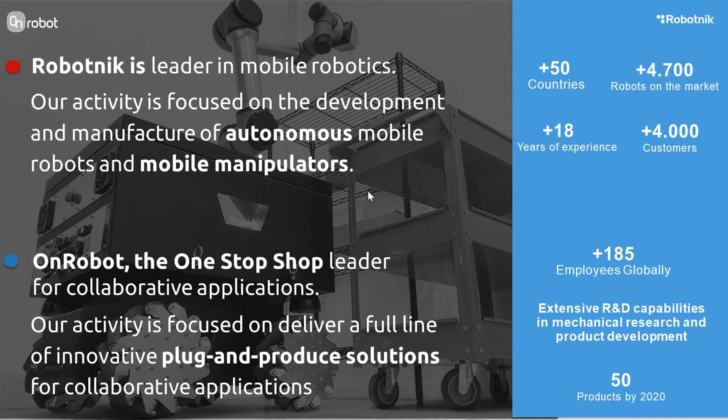Robotnik not only designs and manufactures the robots as final products, it also provides professional robotics services for any kind of applications. That's because we've been taking part in R&D projects since our foundation, and we are used to developing solutions such as manipulating robots, solar field maintenance robots, autonomous bogies for autonomous car development projects, stock control robots for retail shops, for example, and many other applications.

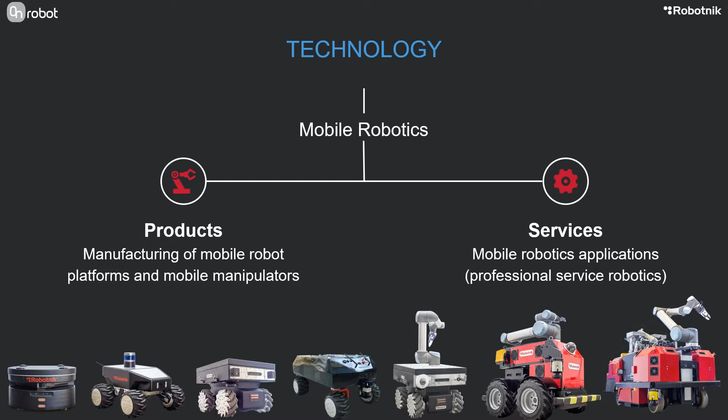As for precision and reliability, this is achieved with good sensors, of course. It is very easy to configure the robot by means of our online configurator, and there you can select for each robot the different types of end effectors, GPS, cameras, LiDARs, and even the arm that fits the most.

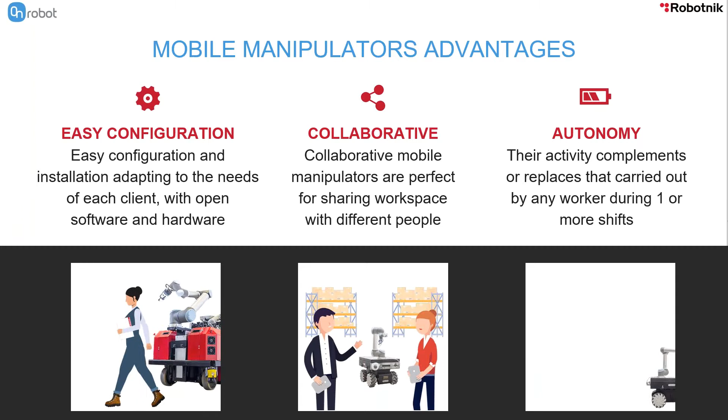All our robots work upon ROS with open software and hardware. They are collaborative and provide enough autonomy to complete a whole working shift. That's to say, 8 to 10 hours. We can also provide an automatic docking station for autonomous recharge if you need to work non-stop.

My colleague Marta will explain in depth several of the advantages of our mobile manipulators, but I wanted to put a spot on the fleet management system. There are many manufacturers of AGVs that make the robot, but don't provide all the software packages. And then they entrust all the navigation aspects to an external navigation system with non-open source software. Well, this has few advantages and many drawbacks.

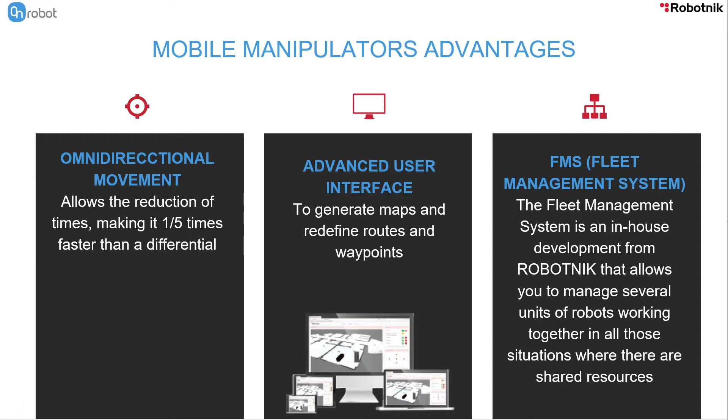We don't do that. What is clear is that Robotnik has an in-house fleet management system, and we offer the robot with the complete package, and we provide support at all times. In the other way, as there are several suppliers, what happens at the end is that they pass the problem responsibility one to the other, and in the end, the customer doesn't get a solution. And this is not what you want, I guess.

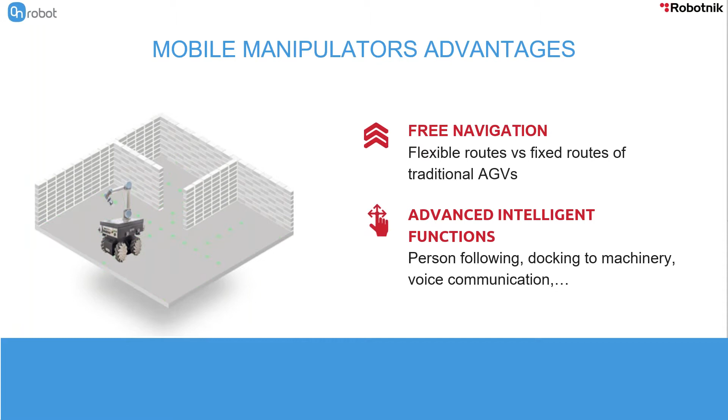Our robots navigate with SLAM navigation. SLAM stands for Simultaneous Localization and Mapping. This makes the whole system much more dynamic because it's not required to add or build anything on site, such as magnetic tape or punctual magnets to be embedded in the floor. The robot will build up a real layout of the environment and will locate itself at any moment as it navigates.

We have a wide range of advanced intelligent functions that make our robots suitable for applications such as the hospital fight against COVID, industrial logistics, last mile delivery, and many others, either indoor or outdoor.

To be performant in all those missions, the manipulator must be equipped with the appropriate end effectors and also the appropriate visualization tools. In that field, we rely upon OnRobot, which has the capacity to deliver a full line of innovative plug and produce solutions for collaborative applications.

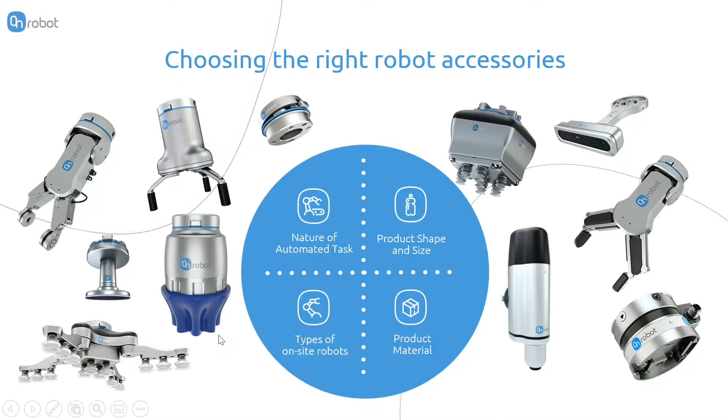Thank you, Nestor. So as you say, we at OnRobot build tools that are a perfect fit for mobile manipulators. On screen, we have now a selection of the OnRobot product portfolio. These tools can be used both in collaborative applications, but also in traditional robotic applications.

Our tools are a perfect fit for a mobile manipulator because they are fully electrical or also mechanical, meaning that we do not need a complex setup of cables or a pneumatic installation to be able to work with our tools in a mobile robot. Now I will focus on 3 of these tools, but as you can see in the picture, we can solve many different applications like material handling, palletizing, surface finishing, screw driving, manipulation in the food industry, etc.

The first tool that I will explain is the Gecko SP. This is a mechanical device made to solve pick and place manipulations of flat objects. With the Gecko SP, we can handle up to 5 kilos, and it is suitable for objects with clean and smooth surfaces like PCBs, glass, polished metals, solar cells, etc.

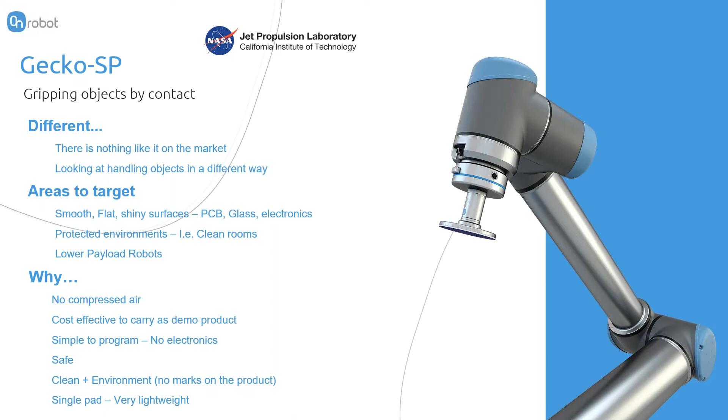The benefit of the Gecko SP is that we do not need any cable and we do not need any programming, resulting in a very fast and easy deployment and a quick return on investment. The Gecko leaves no marks on the objects, making it perfect to pack finished products inside of the box prior to being shipped to the customer.

The second tool is the VGC10. VGC10 is a vacuum gripper with an integrated pump inside of the body. With the integrated pump, we generate the vacuum inside of the tool itself. This means that we do not need any air compressor or pneumatic tubes. When talking about mobile manipulators, the VGC10 is perfect because we can move around the robot and the gripper without having to install any air compressor inside of the mobile manipulator.

It is clear that this makes a saving in weight for the mobile robot and also in cost and complexity for the whole application. The VGC10 can handle up to 15 kilos, and it is very customizable to adapt the position of the suction cups to the geometry of the object that we will need to pick.

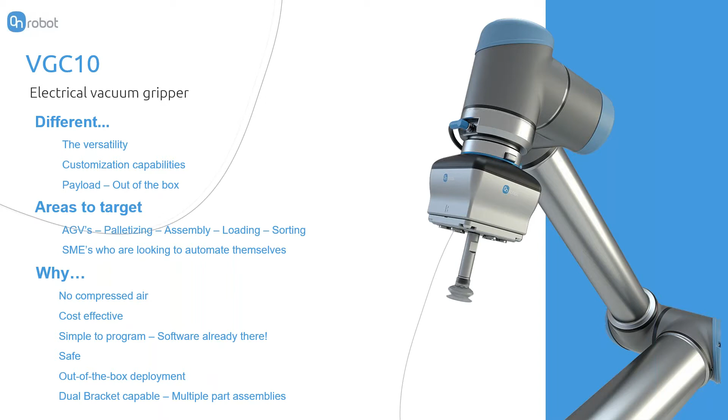Also in the demo today, we will see the vision system called OnRobot Eyes. The OnRobot Eyes is a 2.5D vision system. 2.5D means that we can detect the location of the objects and also their height. The setup of the camera is quite easy. We can mount it either on the robot, like in today's demo that you will see, or we can also mount it fixed in a position outside of the robot. The camera is able to detect colors, different geometries, and we can also do conveyor tracking with the camera.

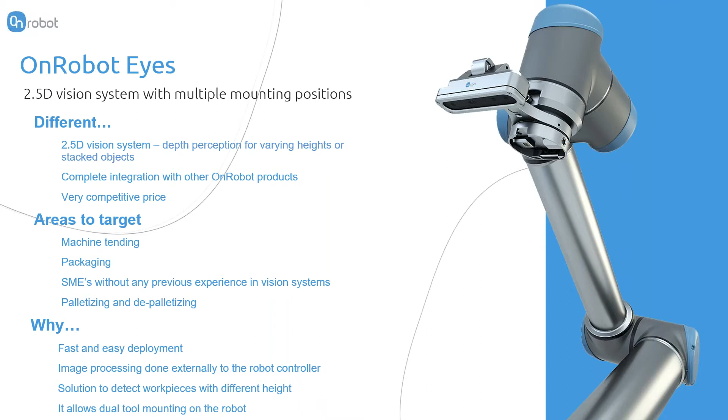My colleague Oriol will show us now what these tools look like and how we can mount them very easily on the robot, thanks to the OnRobot Quick Changer. So please, Oriol, if you would be so kind to show it to us.

Hi all, this is Oriol Vázquez, Regional Applications Engineer for OnRobot in South Europe. As my colleague Enrique said, I'm going to do a small hands-on during this webinar.

Okay, first of all, OnRobot tools are connected and plugged through the quick changer. Through the quick changer, we run just one cable from the quick changer to our brain, our compute box, and with this compute box we can control all our tools. In some robots we can also be connected directly to the robot flange. In some other robots we just run the cable to the compute box.

As you can see, the quick changer is a quick connect and a quick release, and we can connect any single tool that we have in our portfolio. Also, we have the single configuration and we have a dual configuration. We can plug two tools in a row in a configuration like this.

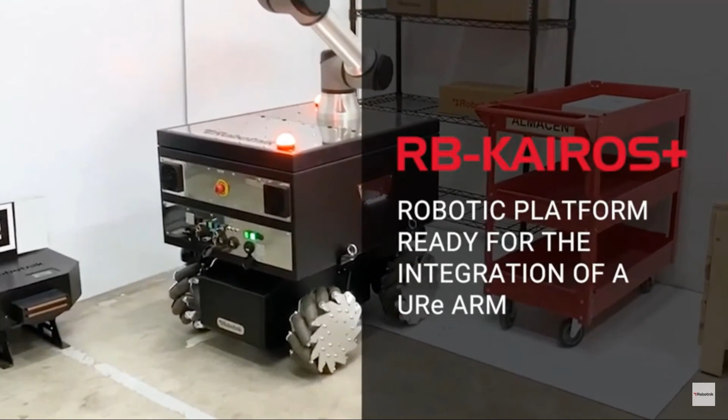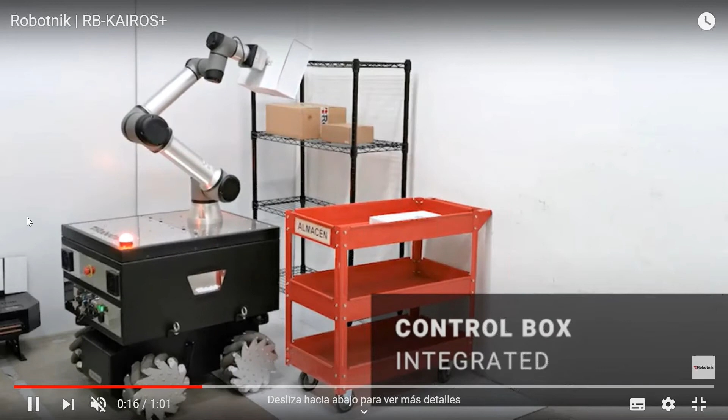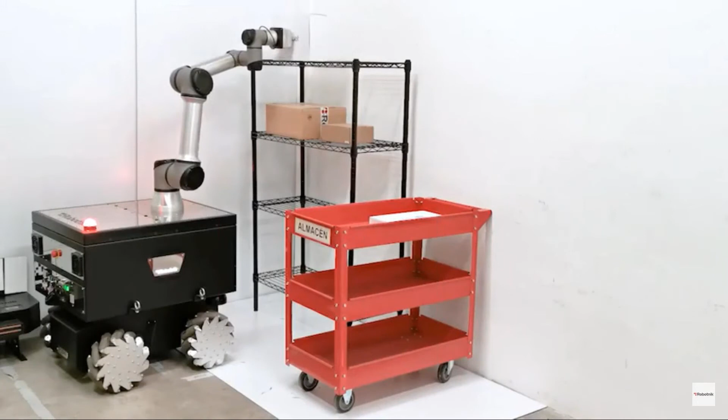Integrating the OnRobot products on the mobile base enhances the possibilities, as it can go anywhere. So you can move the whole OnRobot gripping system or vision system anywhere, because you basically attach it to the robot that will navigate autonomously and move to different places. Here, for example, we have a standard warehouse application where the robot was placed in front of a shelf, picking objects with help of the VGC10 and putting them on the shelves.

As you can see, it's equipped with some visual signals that will alert if the robot is in some dangerous position or whatever, and also the safety laser that the robot is equipped with will help in order to have a complete collaborative application.

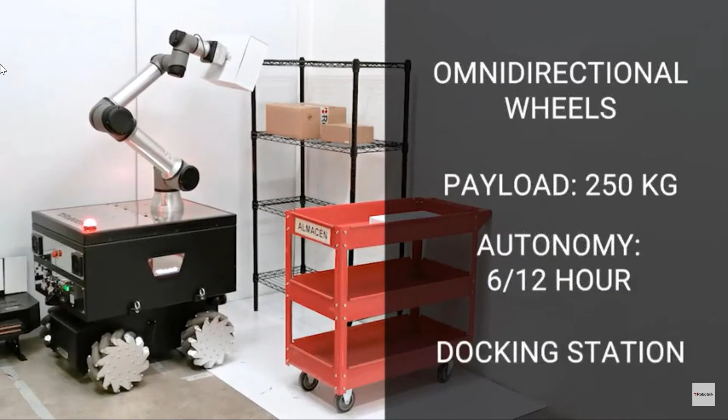Okay, as you can see here, the integration of the OnRobot products is quite nice, because they are already prepared to be attached to a UR arm or any other arm. So the hardware integration is straightforward. As Oriol explained before, you just attach mechanically the different pieces and the wires in case they are needed.

The mobile base is equipped with 12 volts, 24 volts, and 48 volts DC. This is the power for the different components that you want to attach, making it super easy to power on the different things you want to use. Also, here in this case, we're using two OnRobot products, and we have enough outputs.

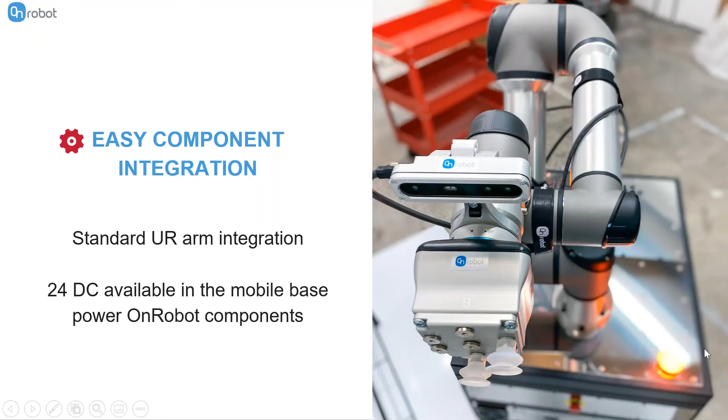Marta? Yeah. I think there are some problems with the image. Let me please try to share my screen again. Okay. Yeah, I see it properly. I hope, is it okay now? We can continue. Okay, I think now it's okay.

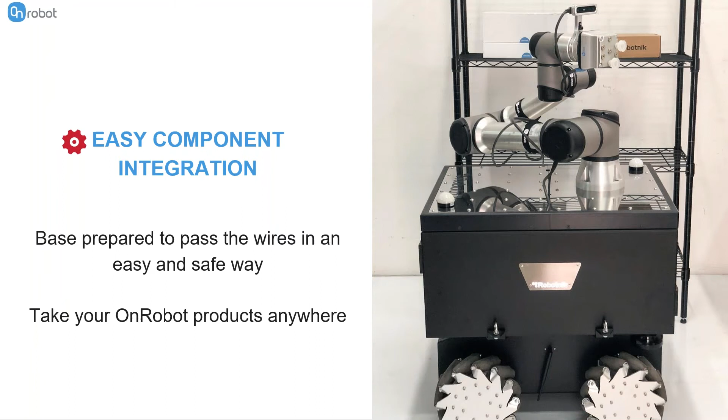As you see here, in case we are using some OnRobot components that require wires, which not all of them do, the base is prepared with some holes that can be covered in case they are not used, to pass the wires through a place near the robot's attachment. So, like you can see in the image, the robot wires pass through there, and the control box and the powering are all done inside the base, giving a really easy integration that is also quite visual, because you don't see the control box or the powering; everything is integrated in the base.

So, as a short summary, when the OnRobot products are equipped on the mobile manipulator, you can take them anywhere. You can make use of them in your whole installation, because you move the whole system with you in an efficient and autonomous way, and also a safe way that can lead to very interesting collaborative applications with the workers in your company.

And that's it. Thank you, Marta, and also Oriol for the demos and the explanation. So as you have seen, the OnRobot tools fit perfectly with the Robotnik mobile manipulators due to the quick changes and also because we reduce the cables and the setup of the tools. The idea is to make it as easy as possible to get a quick return on investment.